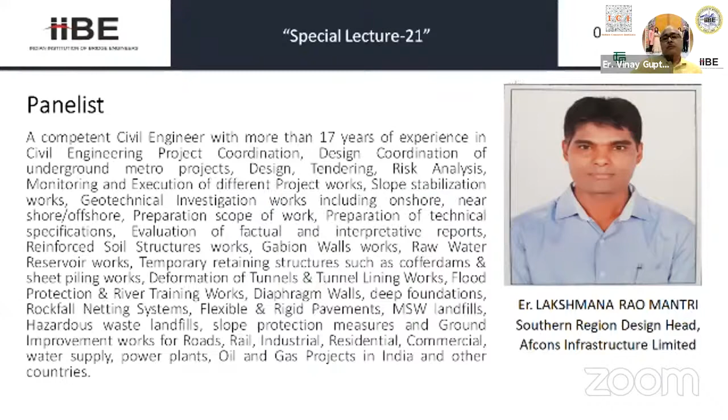I know some of you panelists, maybe also in the audience, had the chance to travel to India in the past to discuss or even present the soft eye technology we mentioned, typically with the ICI conference and similar events. But today we wanted a new angle on this material, GFRP rebar. As Mr. Vinay Gupta explained, even though we've used soft eye for 25 years, it's a bit of a shame to have such a beautifully engineered material and only use it to destroy it after 1 or 2 years. There's so much more we can do with it. So today's presentation will focus on permanent application.

We will start with a quick introduction to review the material properties, because we cannot assume everyone is familiar with that—though people involved in tunneling would know. After that introduction, we will dive into specific aspects of permanent durability and lifetime. Mr. Gupta mentioned shear creep. Actually, I had difficulty squeezing all this into 45 minutes, but if those topics are raised in the panel section, I would be more than happy to tackle them. So let me give you a first presentation in the short time available, and I'm happy to take more questions in the second part.

So, first introduction and properties. Let's look at a bit of definition. FRP is a big family of materials. FRP stands for fiber reinforced polymer. As the name suggests, on one side we are using a type of fiber.

At Dextra, we use mainly two: glass fiber, of which we have many different grades, or carbon fiber. I would say in 90% of cases, glass fiber is suitable for the application. We really only use carbon fiber for very specific high performance, heavy duty applications, or some very big concerns, which we address with carbon fiber. Glass is really the general purpose material that can address most applications.

The fiber would probably give most of the mechanical performance, while the resin is really what gives the durability of the product. Typically we use polyester for temporary applications—again, soft eye, tunneling—because it has a shorter lifetime. When we look at permanent applications, we have to upgrade to other types of resin, typically vinyl ester or epoxy.

So looking from a supplier's point of view—Dextra as a manufacturer and supplier of this solution—we have to see that fiber and resin are our raw materials, the same way a steel mill plays with chemical composition, carbon content, and other elements like manganese and phosphorus to create a ductile steel, a high performance high strength steel, or stainless steel. The same way, by selecting the right fiber, the right resin, and the right process together, we can give very different properties to the FRP product.

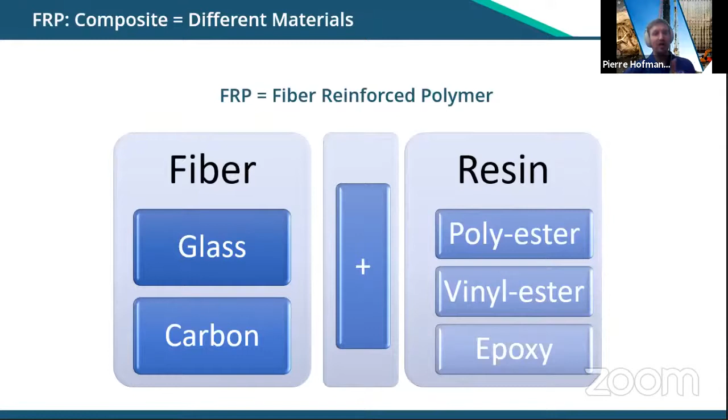During this presentation, we will mostly talk about GFRP, G standing for glass fiber reinforced polymer. So what are these FRP rebars? I'd love to talk about everything about FRP—I would have loved to talk about caverns for oil and gas storage too, that's another topic we tackle—but here we will really focus on reinforced concrete applications, RC structures, and look at rebars as a substitution for conventional steel rebars.

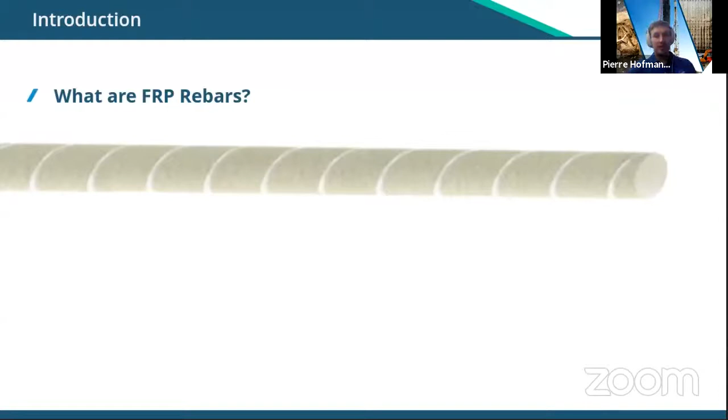The product we propose is a rebar following this geometry, with two main features. One is the surface is sand coated, which increases the roughness of the surface and increases bonding with concrete. The second feature is this helical wrap—we see the spiral going along the bar—which creates surface deformation and small ribs. The two features together bring great bonding properties to GFRP.

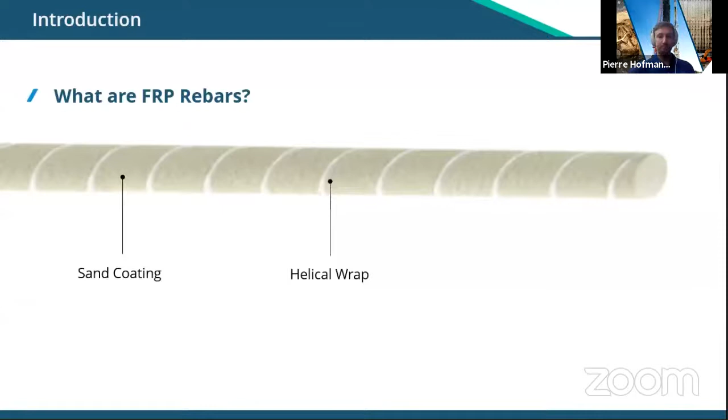As per the code, we guarantee 9.6 MPa, making this much better than steel rebar, steel strand, or even fully threaded steel bar. All those products will have a lower bonding property than a GFRP bar. This is one of the advantages we find with GFRP rebar.

And again, the objective is building on the strengths. Everything we will see in this presentation is to understand the properties of GFRP—its strengths and its weaknesses as well—and understand in which cases it makes sense to consider GFRP as a substitution, and in which cases it doesn't. I don't think any FRP manufacturer intends to replace steel in every application. It remains today a niche product that can advantageously replace steel in some applications, and that's what we want to target.

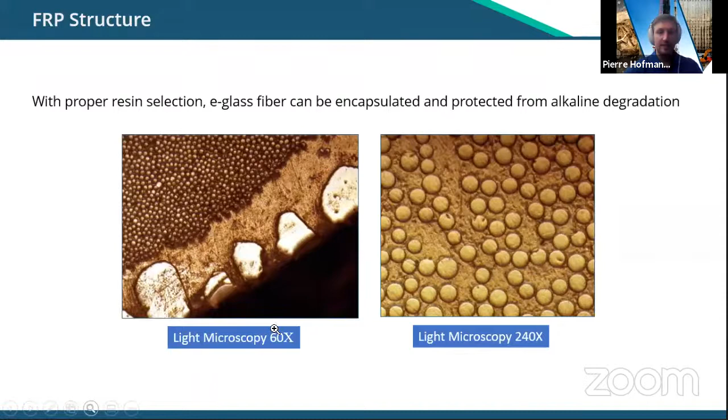Let's look at the surface of the bar. Here I'm offering a microscopic picture of the surface of the bar. Let's look at the left side first. What we see here is the edge of the bar.

The big white spots you see at the bottom are actually sand grains. You can appreciate the size compared to the individual glass fibers shown at the top left corner - you can see how tiny they are, only 15 to 20 microns in diameter.

This vast brown area here is actually resin. So we can see that the resin is really acting as a binder between the fibers here on the outside and the sand on the surface.

But now, looking at the resin in those fiber areas, we can zoom in further. And what we find is the resin is also actually binding all those fibers together. So each individual fiber is encased in resin matrix.

And so that resin will help to create additional protection. You have an outer layer, but you also have resin within each asperity, each gap between the fibers, and that resin will also transfer the load.

It's important to see, we are talking about composite material, so it's not monolithic. It's important to have this resin acting well to transfer the load from the outside of the bar, its perimeter, towards the inside.

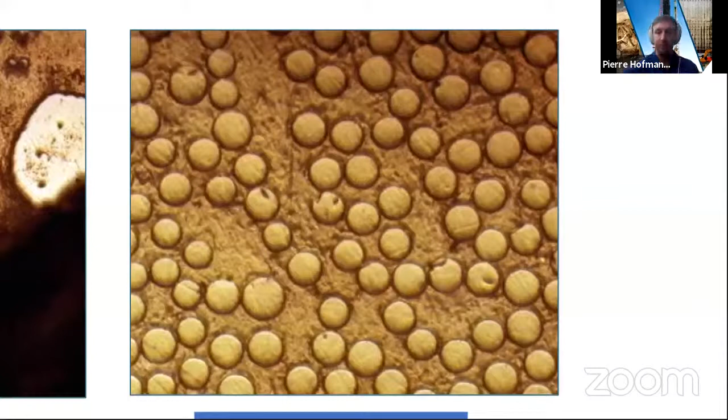Now that we understand how the product is made - again, I had to shortcut the manufacturing process a bit, but it would be too long to review fully - let's look at properties and design. This is really what we should care about now.

First, I need to explain that typical characterization of material requires obtaining a stress strain curve, which requires conducting a tensile test. Tensile tests are governed by different standards; the most common is ASTM D7205.

However, if you were to put the GFRP bar directly into the tensile machine, you would crush the bar. So we had to add steel sleeves and fill them with grout so that the material is not crushed. And I think the interesting part is the outcome, the result.

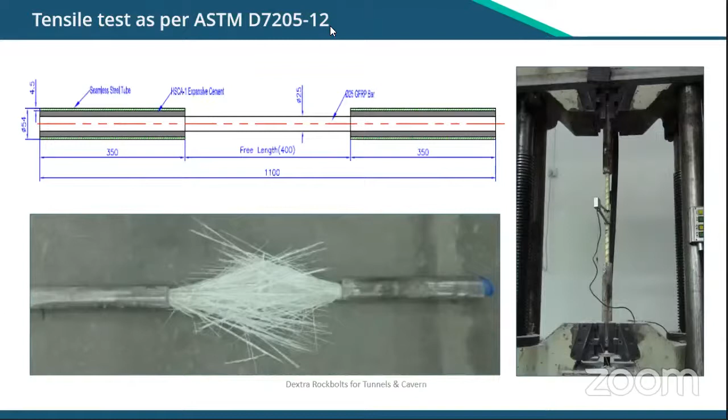Since we don't have yield point, we don't have this ductility, and therefore much less deformation. I think for all the engineers that we are, once you see this graphic, it's very easy to understand that it is not possible to design a concrete structure reinforced by steel and a concrete structure reinforced by GFRP using the same design code. My point is, even if we were to just use the GFRP parameters input into any steel design code, it would not work, because fundamentally the way the material behaves is not the same.

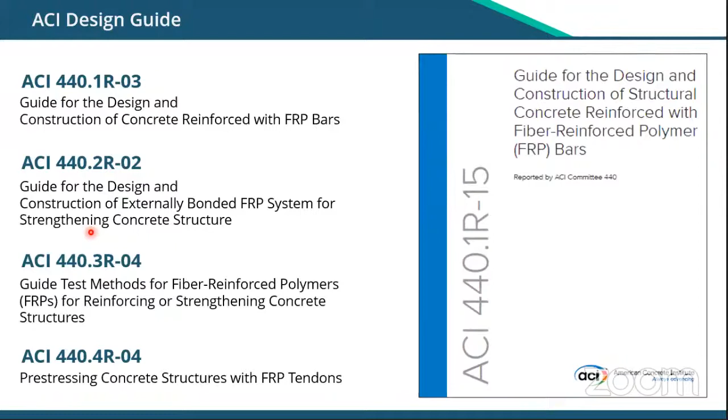Again, looking at the design methodology or design philosophy of ACI, it's all about balancing the failure mode. In a typical GFRP reinforcement project, we are trying to get both the rebar tensile rupture failure happening at the same time as the concrete crushing. It's important to remember, since GFRP will deform 4 times more than steel, it's definitely possible to reach concrete crushing relatively fast or relatively easily early in the design. So we really need to check carefully what is governing the design. And of course, the objective is to balance as much as possible to get something optimized.

Again, I mentioned Dextra as a supplier of the material. I think it's very important to understand these design methods are specific. In most cases, engineers locally might not necessarily be familiar or expert at using ACI 440, which is different. And so this is why it's important for the partner that you have to offer a design that is optimized, correct and genuine. What we sometimes experience and find difficult is that it's easy to make shortcuts with those guidelines. Again, this is not actually a code, it's a guideline. And we can definitely see some safety concerns if some people take shortcuts with GFRP. As you understood, we don't have this ductility, and so it's really important to pay attention to how the design is governed.

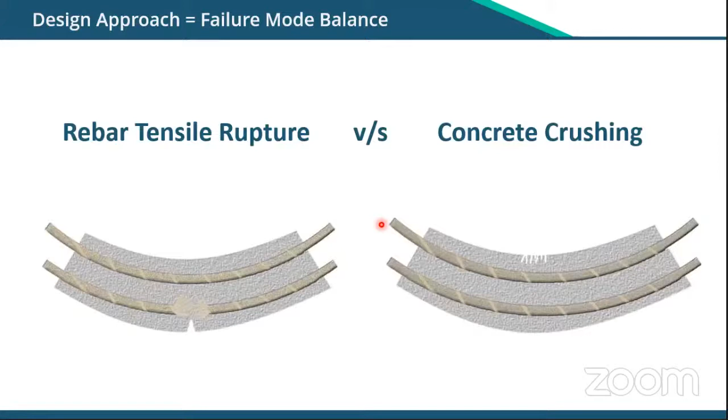So let's look now at the product range. What are the elements available for us to design?

Well, this is a vast table, but let's remember in short a typical data sheet. At Dextra, we promote mostly two grades for permanent application: one grade we call 45P, so modulus of elasticity of 45 and P for permanence, and another grade 50P, 50 for modulus of elasticity and P for permanence. But actually we go up to 60 - this is less common, but we can offer 60 GPa.

As you can see in our range for permanent application, we go from diameter 6 to 41 mm. If you have a quick look at the ultimate tensile strength, this is connected to what I mentioned earlier: the smallest diameter will have the highest strength in MPa, while the biggest one will have the lowest. Here are two examples of two different grades, but that's typical of what you would expect.

I mentioned the VE resin that is very important for permanent application - VE stands for vinyl ester. We also offer bend bars, so stirrups from diameter 10 to 25.

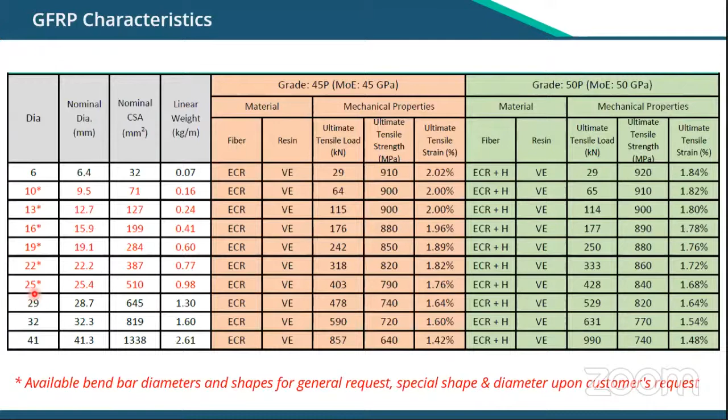An important aspect about the bends is that all the bars being made of GFRP material, and most particularly what we call thermoset resin - once this material is cured outside of the production line, it can't be deformed. It can't be shaped, it can't be bent like you would do with a steel rebar.

So that means Dextra's involvement in terms of manufacturing - we are like the steel mill, as I say. We prepare the formulation, but we also need to do all the cut and bend work. Outside of our factory come the bars already cut to length, already in the proper shape. That goes from what we call conventional shapes - C shape, L shape, or loops for piles typically.

Of course, we can also do more complex shapes. However, they require mold tools to produce. So it's also important to work closely with the designer to ensure that whatever shape is selected, from a manufacturing point of view it will be possible to execute. That's also why we work really closely with designers for that purpose.

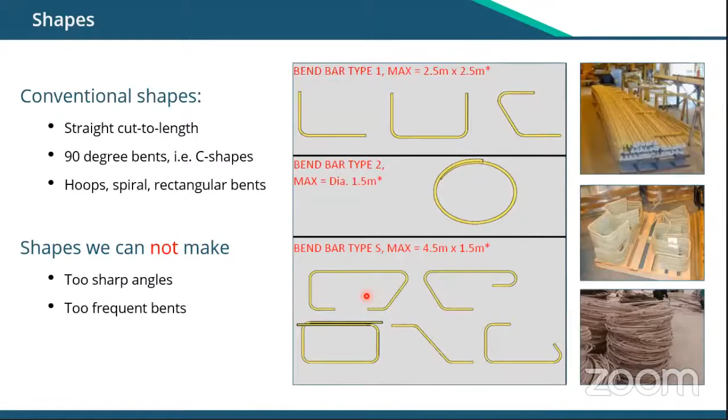At this stage, I think I've introduced the GFRP material in quite a bit of detail. I would like to look specifically now at long-term performance and durability. These are aspects that are traditionally not tackled, or only a little bit tackled, with temporary applications because we only care about 1 or 2 years. Here we will really look at what's happening with GFRP material over a long period of time.

I would say there are really two factors we care about when looking at long-term performance. On one side there is the mechanical impact, typically creep, as mentioned earlier by Mr. Vinay Gupta. But also on the other side, there's everything related to durability - the environment, degradation, corrosion. So we will look at those two aspects, and this gives us two factors that we need to apply to the material.

First topic, creep. I think it's a nickname, but a very good way to summarize it: the static fatigue. While fatigue will have some impact on the material cycle after cycle after cycle, here creep will show the impact on performance.

So typically we are looking at retention, creep retention, and it's related to a static load. As you would expect when you do an RC structure, here we assume our reinforcement is under a constant stable load, and we want to see the effect.

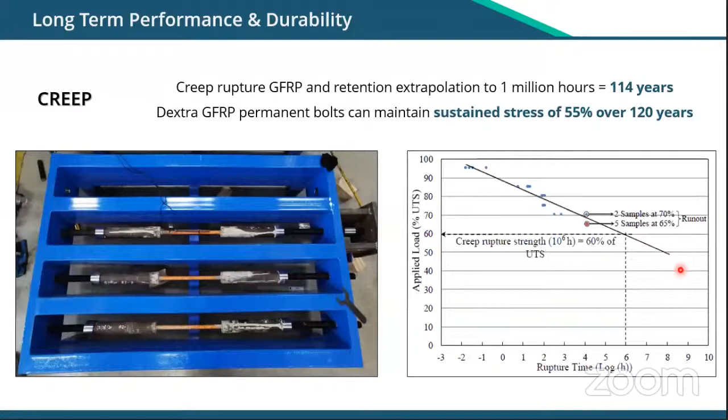The second aspect would be the environmental factor. So we're not looking at mechanical degradation now, we're looking at chemical degradation. The main thing that could affect the performance of a GFRP bar is the alkali environment, the high pH, typically found in moist concrete. We know alkalinity is used in concrete, and it's actually useful, it creates passivation and protects the steel rebar. But in the case of a GFRP rebar, alkalinity could degrade the GFRP bar performance over time.

The purpose of this test is clear: accelerated aging, to understand what will happen if a GFRP bar is in this environment over a long period of time. So how do we do this accelerated aging? We push the pH to a very high level, between 12.6 and 13, and also make the temperature very high, around 60 degrees Celsius. That means over a 6 month test, we can replicate the ultimate time of 100 or 120 years.

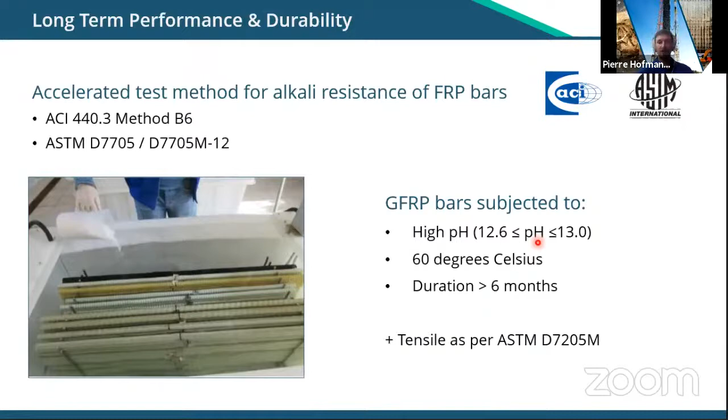The bars have been selected and taken after 1 month, 2 months, 3 months, 6 months, and we can see the impact over time. Typically, this is the kind of behavior we would see, this is a test we have conducted even recently. While GFRP will lose some performance quickly after about 1,000 hours, 40 days, it quickly plateaus, and we can see it would generally retain about 80% of its strength over a long period of time.

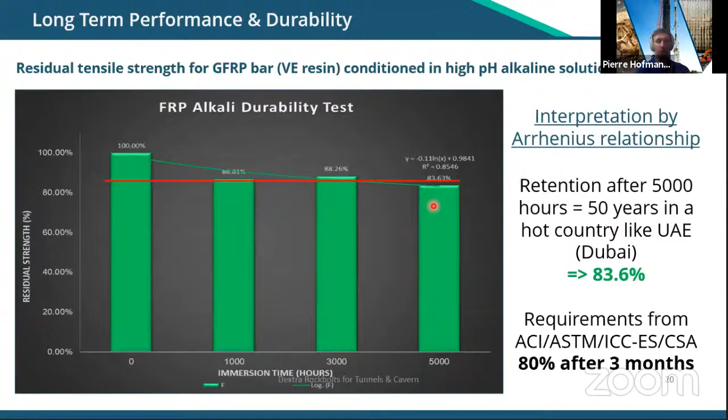While most standards require at least 80% after 3 months, what we've tested at Dextra, we were able to maintain this 80% plus even after 5,000 hours, that's almost 7 months. That's really the interesting aspect, because we know steel material would corrode, would degrade, and that would even accelerate so the concrete might burst and spall. The beauty with GFRP is really that after an initial loss, the reaction is logarithmic and almost zero, the further loss.

For reference, this is not in the code or any standard, but we ran the same test by dipping the bar into a saline solution, very useful to simulate marine application. You can see in that case, the GFRP bar from Dextra, sample B, was pretty similar to the competition here, 80, 85%. So I'd say chloride and saline water solution have a typical effect on the bar similar to alkali, or even slightly less. This is not a concern, using GFRP also for saline application, coastal areas, this is particularly applicable.

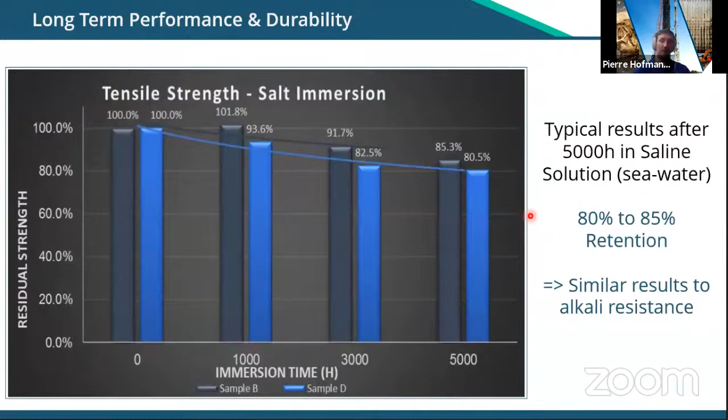Just before diving into application, which I think would be the biggest interest, let me talk about a key aspect, because lately I received a lot of questions about environmental impact, the impact of GFRP as a material on the environment. So again, how does it compare to steel in particular?

First thing important to know is the composite material, I mentioned resin, people are afraid of the chemistry. It's important to know that once the resin is cured, we can't change the shape, but it's also an inert material because all those molecules are what we call saturated. So there's no risk, even if you were to put that bar in contact with drinking water, there's no concern for the environment at all. It's absolutely inert, there's nothing bad about this. What's very interesting is both the production and the usage of the product.

So the second item, here you can see I put the reference of the studies for your reference, if you're interested. We can see that GFRP bar during production will produce 43% less CO2 emission than the steel bar, and also will require 46% less energy.

I think in today's world, we see the population increasing, and we know the concern about the environment for future generations. This is already bringing part of the solution. I'd say a big part is due to GFRP being 4 times lighter than steel, which is one reason why it requires much less for production. But something interesting is, on studies of the whole life cycle of the product, we can see that the impact on the environment with GFRP is 35% less than steel bars.

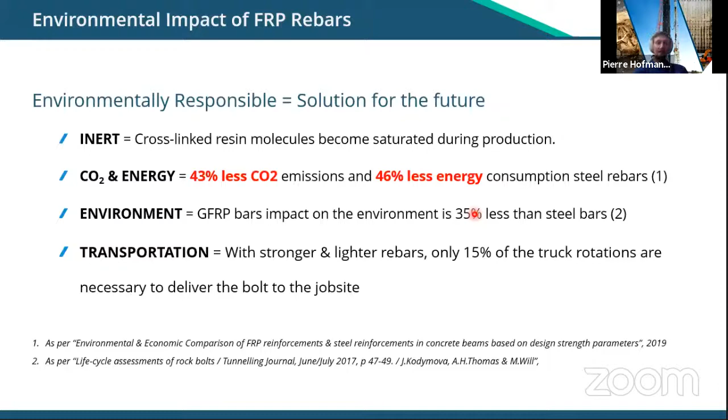The last aspect, I'll illustrate on the next slide, is purely about transportation, and I think this is one of the most powerful aspects. Allow me to summarize this way: since GFRP is stronger than steel, if we look at a simple application, a slab on grade with mostly temperature and shrinkage concern, we would be able to substitute a steel bar.

A steel bar of diameter 12, 13, 14, let's say around this diameter, by a smaller size, typically a diameter 10 in GFRP. When the steel bar, diameter 13 - let's say on the US market, number 4 - is about 1 kilogram per meter, the equivalent GFRP substitution bar will only be 6.5 times less, only 160 grams per meter. And this is the beauty. Here I mention it in terms of truck rotation or delivery, but the beauty is also at site when it comes to steel placement installation. Everything will go much faster, easier, because so much less material is required.

So I believe after reviewing all these aspects, we can really tackle application now. What I'd like to propose in the next 15 minutes is an overview of applications where GFRP can be used. I will also propose a specific case study where we can see a substitution that's been done on a project, originally designed with steel, and how the calculation was done to show GFRP would be beneficial in replacing it in that application.

So you'll see the applications we'll review. In many cases, corrosion is a big concern - that would be a main driver. Some niche applications look at additional features, typically no magnetic interference, no electrical currents, or maybe thermal conductivity. Overall, in projects where specialized steel is considered - epoxy coated, galvanized, stainless steel - this is definitely a sign that it would make a lot of sense to consider GFRP rebar. I'm not saying it will work every time, but it's a good sign that GFRP should at least be considered. And I'd say in all applications, the weight reduction is an advantage, generally comes on top - it's just not common to consider it by itself.

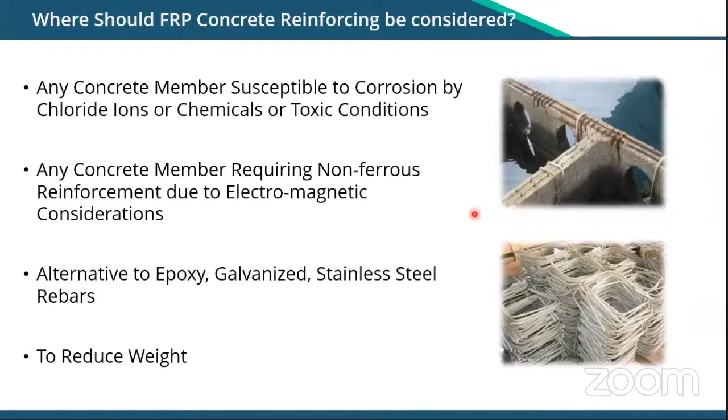I'll show applications. First, considering the audience and bridge engineers, a permanent application using GFRP is bridge deck. There's 20, 30 years of experience in North America. I think it's specific to cold areas because of de-icing salts. In the northern states of the US and in Canada, all winter long, once the snow and ice melt, it infiltrates the deck and corrodes it.

Some of the pictures here - I purposely took this to show you the first generation. The initial design was to use epoxy coated steel and just add a top layer with GFRP. But for the last 10 years, all the projects in Canada, and again in the northern part of Europe, there's no steel rebar at all in the bridge deck - it's 100% GFRP reinforced. That really shows we've come to maturity. When people were reluctant to use GFRP for permanent and structural application, we are there today. People now have experience, background, case studies. They've done coring into those projects to prove that GFRP can really replace the steel rebar in the whole deck.

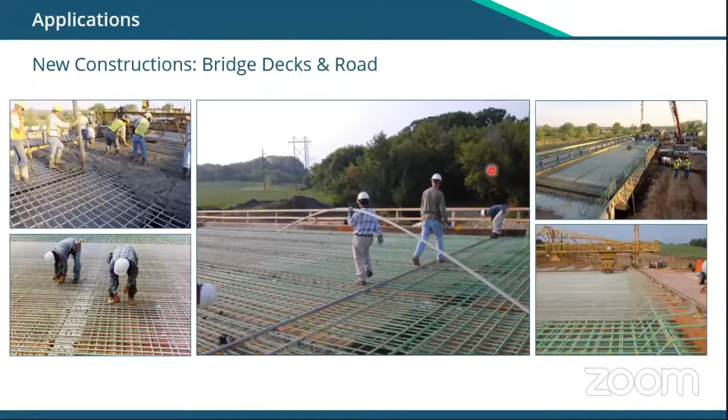Looking at other applications, this is what I'd call more niche, but GFRP are used typically in MRI inspection rooms in hospitals because there's no electromagnetic cage or field generated from that. Also, many countries now create toll gates you can drive through without stopping using RFID technology, and in those places they use GFRP rebar for the same reason, or close to control towers in airports.

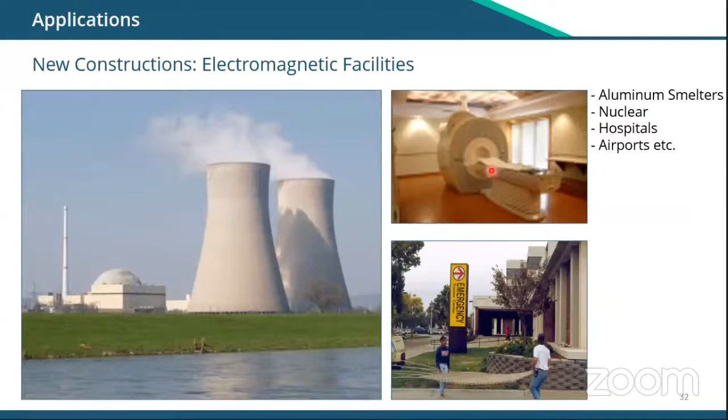Marine application is something we definitely address more and more. I'll show you some early examples we addressed. I think it's very relevant for bridges. I'm familiar with some of the big projects in India, and many are related to coastal areas, so you have a lot of bridges with piers in the sea. Think about intertidal areas, splash zones - there are many aspects from the marine environment, and this is really an area where GFRP makes a lot of sense.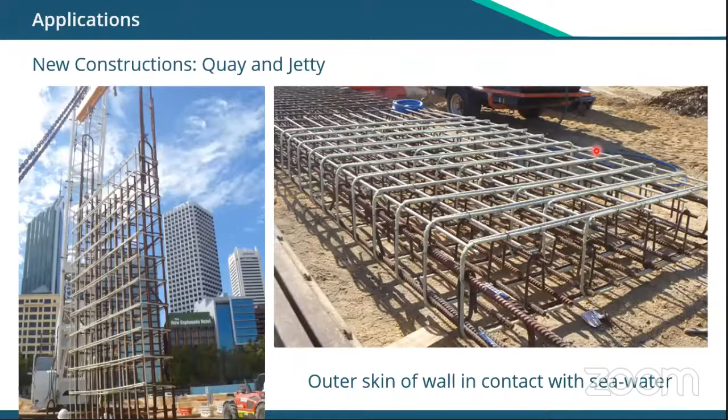Today, we're able to offer the full cage in GFRP, and this is being done. Dextra is now working on two precast projects for marine application, one in Hong Kong, one in Australia, and everything has been designed with GFRP.

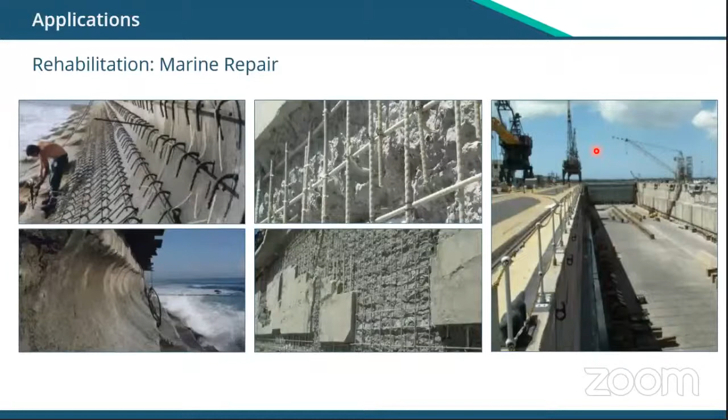Here we have an example of marine application but for repair. This is actually Pearl Harbor Dry Dock on the US Marine Base in Hawaii. You can see how they use our GFRP - they dowel the GFRP bar, epoxy glue them, and then they're able to lay a new layer of concrete to repair it.

This is a project we're now also working on in Thailand. Actually, three hours ago, before giving this presentation with you all, I was presenting this same topic in Thailand, and they are using this for a jetty. You can see how we use both post-tensioning with a steel member plus GFRP shear dowels. We have a lot of questions about shear, because every time a boat hits the pontoon or jetty, there's shear load applied to those dowels, so we explain how we can do the design for that.

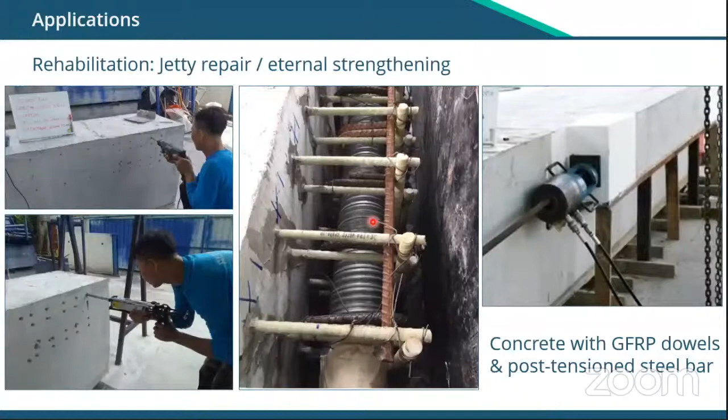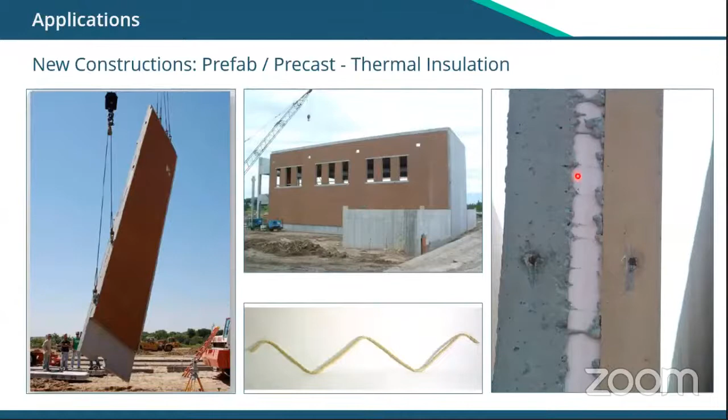Insulation - maybe just to mention very briefly, when you have a typical sandwich panel, precast sandwich panel, you can see the shape. The GFRP bar is used in this zigzag pattern to connect the panels together without creating a thermal bridge. That's how it works.

Precast, I mentioned earlier, but there are many precast applications using GFRP. In addition to everything mentioned, weight reduction is very critical for precast. We're not so much looking at reinforcement weight reduction - it exists, GFRP is 4 times lighter - but the great saving is on the concrete cover. GFRP not being afraid of corrosion, we can reduce the cover from 75, 50 to sometimes only 30mm, which really reduces the weight of the concrete element, a key factor for precast companies largely impacted by transportation costs.

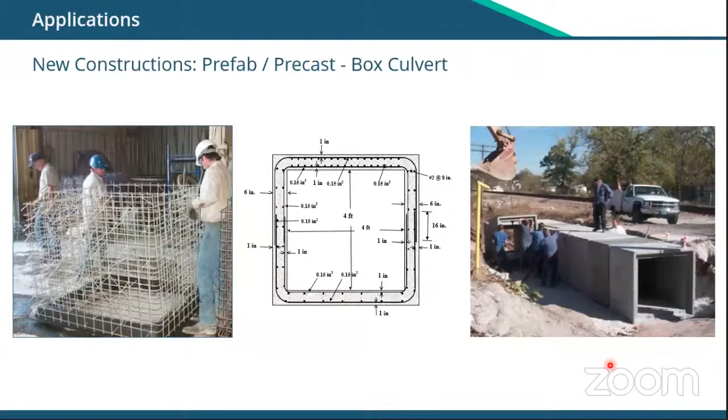Last but not least, these are maybe the applications we see the most now - slab on grade. Here's a typical example of, let's say, homeowner applications, driveways, parking lots, but we also do a lot of industrial slabs. So instead of using steel bars, going with GFRP, you can see the spacing - you can space them out, and it's very easy and fast to install those projects.

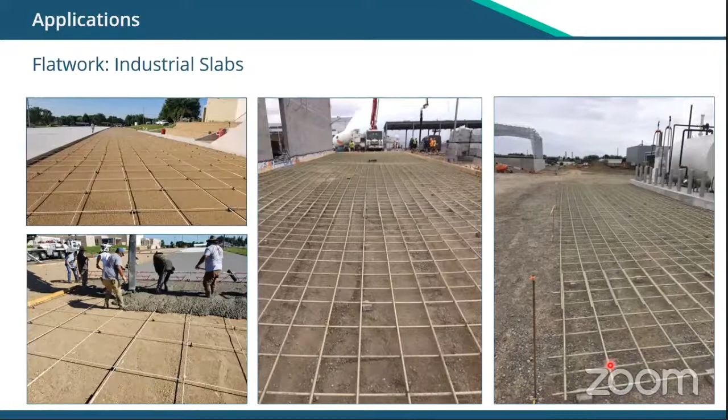The case study I'd like to talk to you about today, with the few minutes left, is a project we've done in the Middle East, in Saudi Arabia in particular, where they used to go with epoxy coated steel on coastal areas, and they are considering replacing it with GFRP rebar.

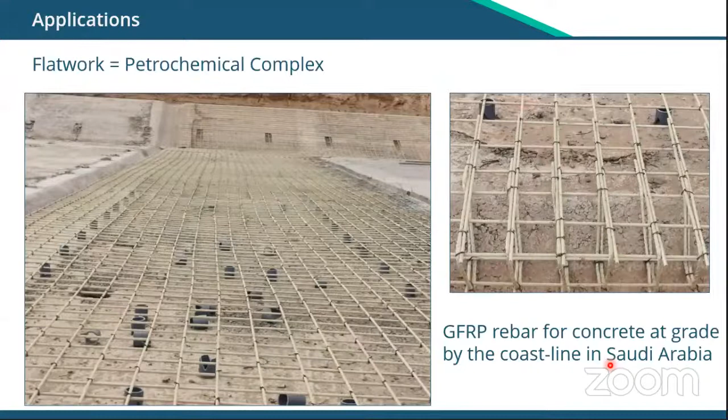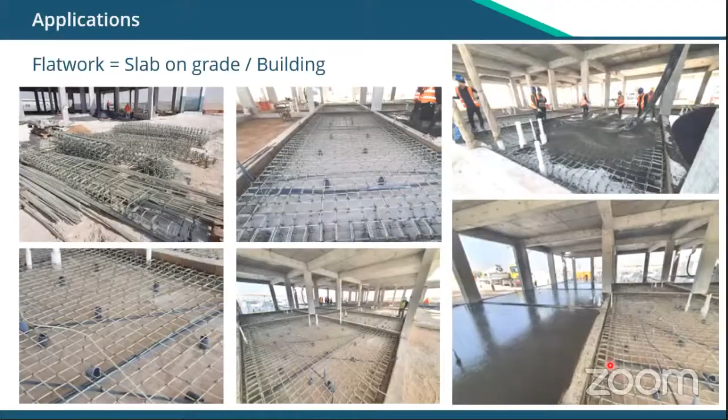I will talk to you about what we call the Jizan flood channel case study. It is a case study for Dextra, but I can really say it is a worldwide case study. It has been published in several magazines in North America and worldwide because of the magnitude of the project.

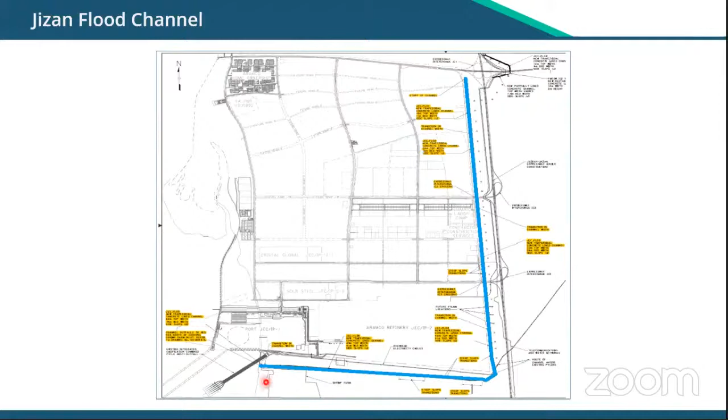This flood channel, the blue line, is a 21-kilometer project. It required 12 million meters of GFRP bars, and you will see we used diameter 13 for the project. Most of the bars are straight bars, but almost 20% of the bars also required a bend shape. Looking at the typical cut section of the project, at the bottom of the channel the dimensions were 4 to 74 meters wide. That's massive. The typical bar used were straight bars for the slope, with bend bars in those sections.

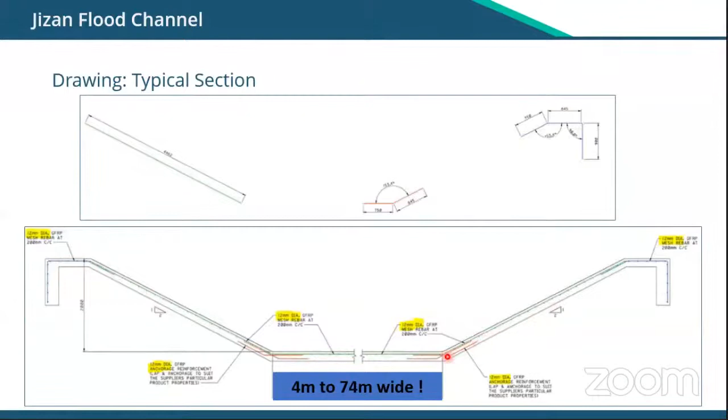It might not be very obvious, but you have plenty of dots here - all the longitudinal bars are straight bars, all the way going for 21 kilometers. So while we have the cut view here, you also have longitudinal bars installed on the project. Let me show you those pictures - this is what the installed project looks like.

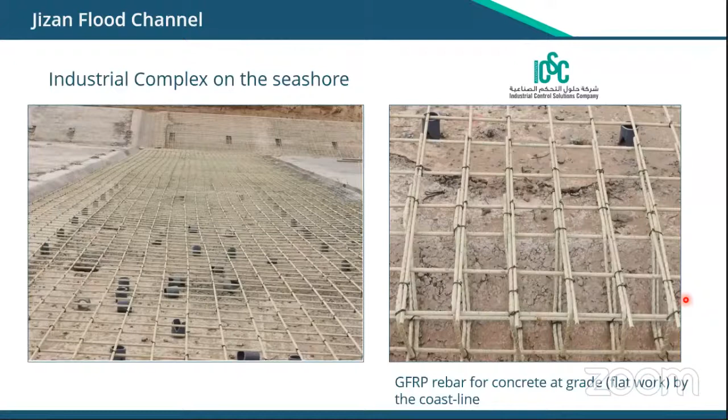You can see that epoxy coated was considered with a tensile strength of 422 MPa, modulus of 200. The GFRP material here was needed at 50 GPa, and they considered 600 MPa. That 600 MPa is already factored with the environmental reduction factor of 0.7. As per ACI code, 0.7 is today the factor applied to consider the alkali resistance and accelerated aging. And of course, in the design, we also make sure we don't go beyond 55% for the creep factor, which is also governed by the ACI design.

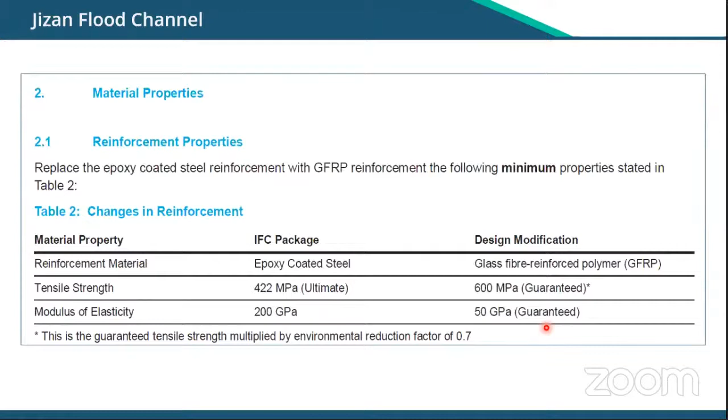So let's look at all the savings done on the project. One of the savings was related to the concrete mix. First, the water cement ratio was changed from 0.4 to 0.45, but also silica fume and some other additives were removed because they are not required for GFRP. So that was one of the savings.

I would say the biggest saving on the project was definitely that since GFRP bar had a higher capacity, but also since the crack width requirement could be relaxed from 0.3 to 0.7 - why? Because there's no issue having a larger crack, there's no risk for corrosion of the GFRP bar, and therefore no risk for concrete bursting or spalling. This allowed the spacing to increase from 150 to 200. This is great because every time, instead of putting 4 bars in steel, now we only put 3 bars in GFRP.

One thing the designer didn't do on this project, and I think this is again an example where it could have been improved further, is the concrete cover was kept at 75. For GFRP that's really conservative, especially for the top part, it could definitely be reduced to 50 very easily. You can also see that lap length was reduced from about 1 meter in steel to 750 mm, and that's thanks to better bond strength.

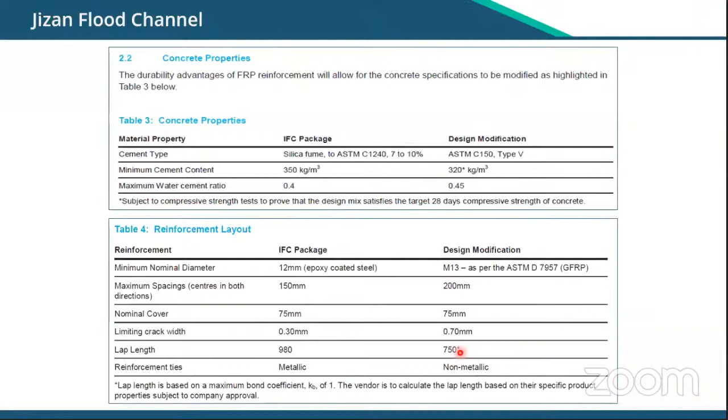I'll be brief again due to time, but looking at the overall reinforcement needed: while 11,000 tons of steel reinforcement was needed, only 2,000 tons of GFRP material were required. You can see the ratio is 5.5 times. I mentioned 6.5 in another example.

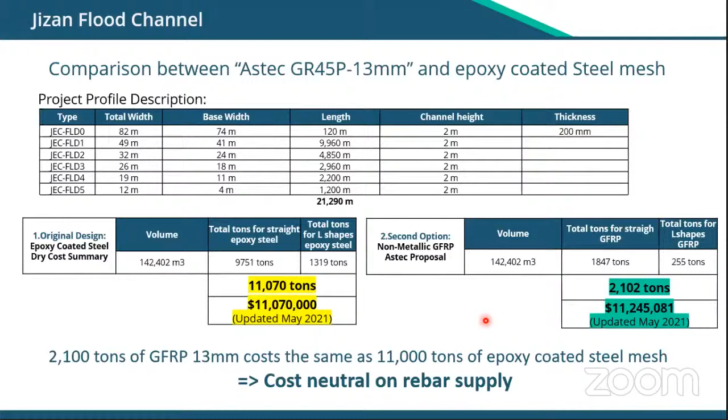That's typically what we expect on a substitution project for slab on grade. The beauty here is that the substitution from epoxy coated steel to GFRP was cost neutral. That means any other savings on the project as a consequence of this change would go in the pocket of the contractor and the owner. Typically the contractor saves on steel fixing, while fixing GFRP costs on average half that of steel. Since you put 5.5 times less reinforcement, there were big savings there, also on wastage, and also savings on the concrete mix, as I mentioned earlier. One of the big savings that was not implemented here is that the quantity of concrete could have been reduced further through the concrete cover, but not on this project.

Even though they designed for 35 years, experience shows they would have to start maintenance after 8 years, while with GFRP they won't have to do this. Again, this is because there's no degrading or self-aggravating situation of concrete spalling once the reinforcement is damaged, if I may say, with GFRP rebar. That's really the big advantage.

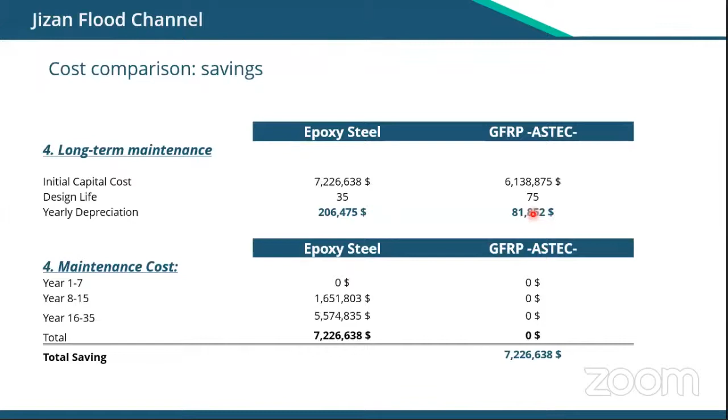So on this project, this is how it happened. But I think it really shows that both the contractor and the owner have a lot to gain from switching to GFRP, at least in those applications.

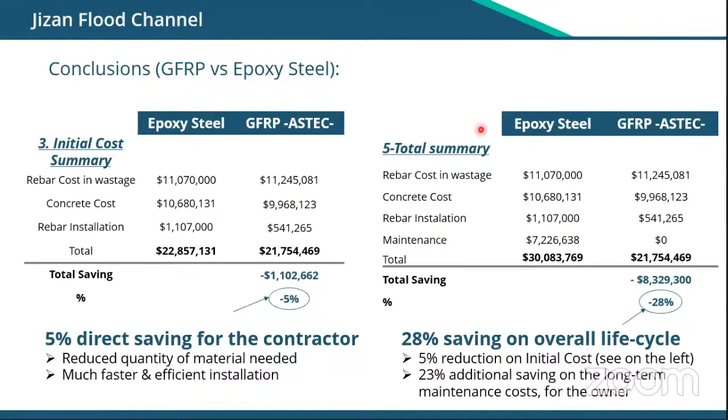And that's all for me. Thank you.

Can you close it? Yes sir, Gopal, hello, yes sir, over to you. I think this is one of the, apart from steel, now listening to the glass fiber, we've got a number of questions. Professor Surya Prakash, one of the experts in glass fiber rod from IIT Hyderabad, is also there. But before I go to all the external panelists, let me ask first Engineer Umesh sir to give his input.

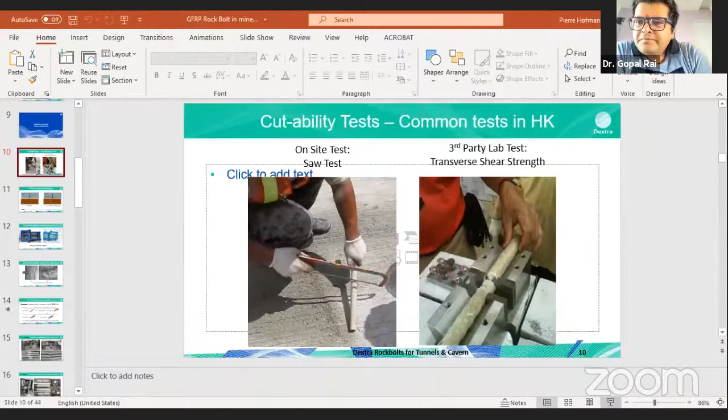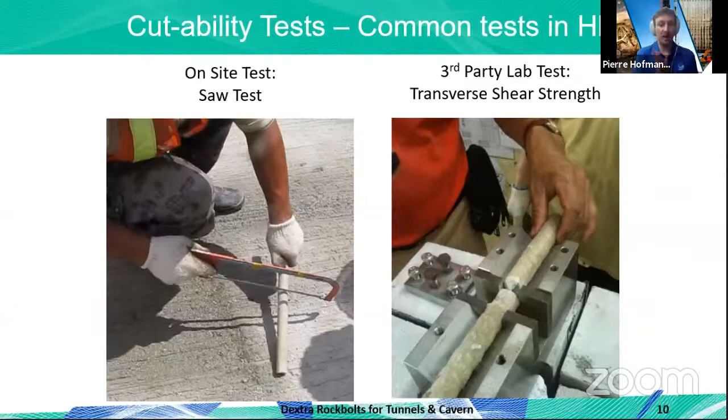I'll be very brief. When we talk about shear strength and cuttability, this is what we're concerned about: the bar easy to cut, easy to shear. Why? Because the cutters of the TBM will crush the bar. So the bar will be in direct contact with the steel blade, or typically what the TBM is doing is what I'm showing on the left side of the screen.

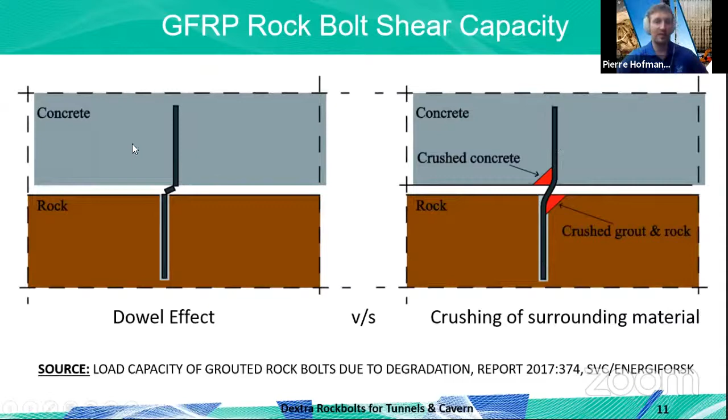What we call the Dowel effect is the pure shear we can imagine. However, in most cases - and this is the title of my presentation, rock bolt for tunnels and caverns - we are supplying 500,000 GFRP rock bolts for permanent application in hard rock caverns, so we had to go through a lot of these questions. In reality, whether in concrete, grout, or rock, you will have this kind of behavior. You will not shear the GFRP bar without deformation. It will crush the surrounding material before it completely fails, and that's why the GFRP rebar will have more shear strength than what we characterize with a simple shear test in the lab.

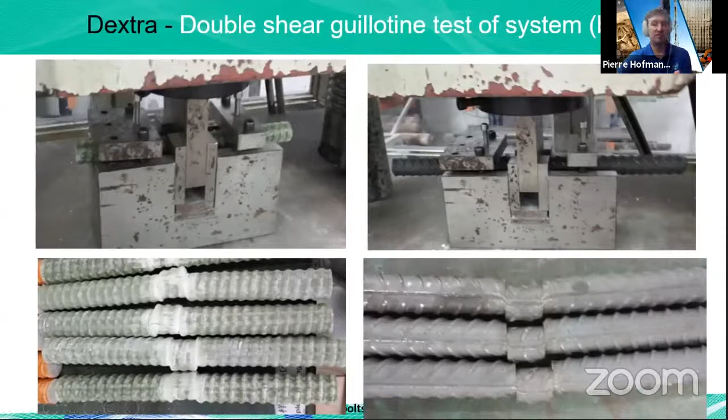There's a lot of tests that have been done. We did some on the Dextra side too, but to give you an idea, we did a comparative test. When we compare the pure shear strength of GFRP and steel side by side, GFRP only achieves 40% of steel rebar. But when we do the same with surrounding material - grout, or concrete would be the same - I'll go straight to the conclusion: it doesn't matter the concrete grade, 30, 40, 50 MPa, GFRP, thanks to the surrounding material, is able to develop 75%.

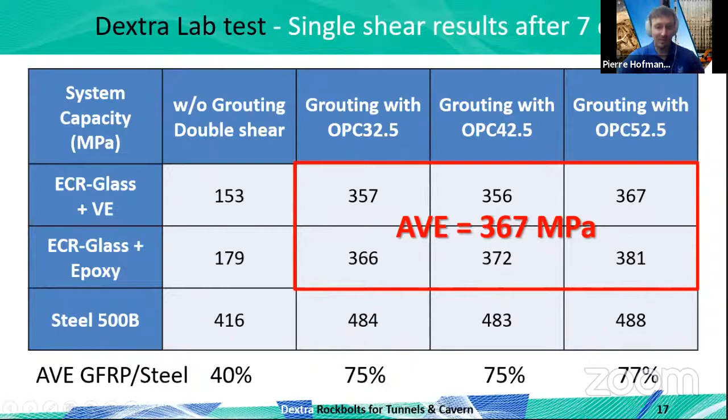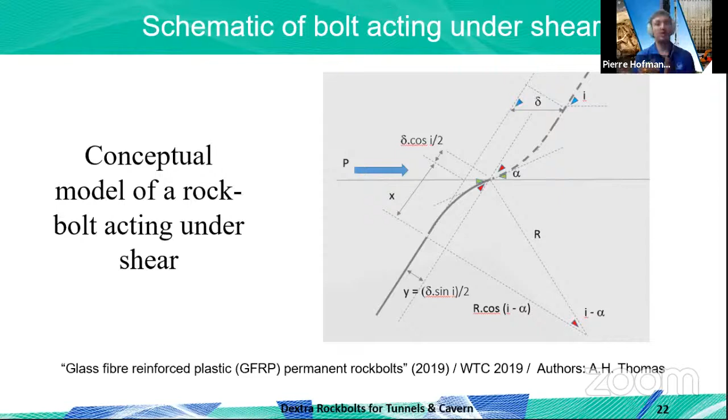And why is that? Because when you allow some deformation, you don't have pure shear deformation anymore - you have one component in tensile and one in shear. Because the tensile strength of GFRP bar is so high, having this split between tensile and frictional, you're able to get much more out of it. There are even papers published about that. I just wanted to conclude: at 90 degrees, GFRP rebar can develop around 350 MPa according to this study, and that's really not bad - it's 75% of what the steel bar would develop.